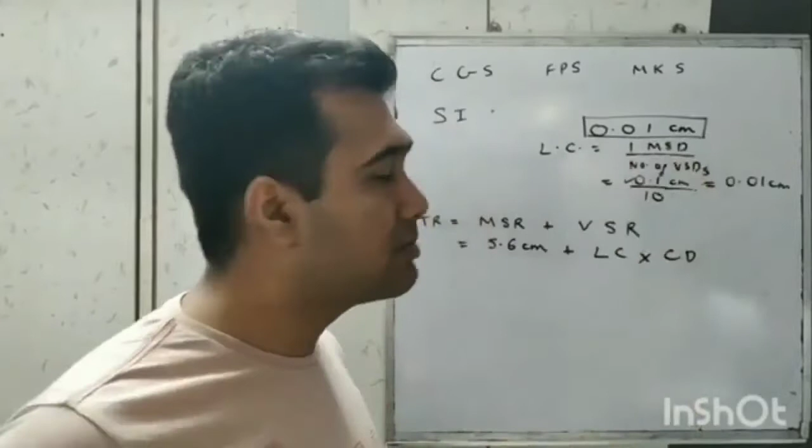If you want to decrease the least count, that is increase the accuracy of the instrument, then there are 2 ways. Either you decrease 1 main scale division on the main scale, or you increase the number of vernier scale divisions on the vernier scale. Lower the least count, more accurate is the instrument.

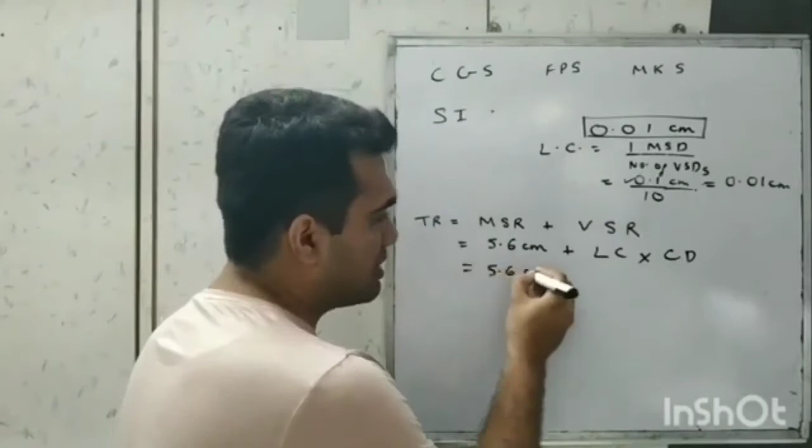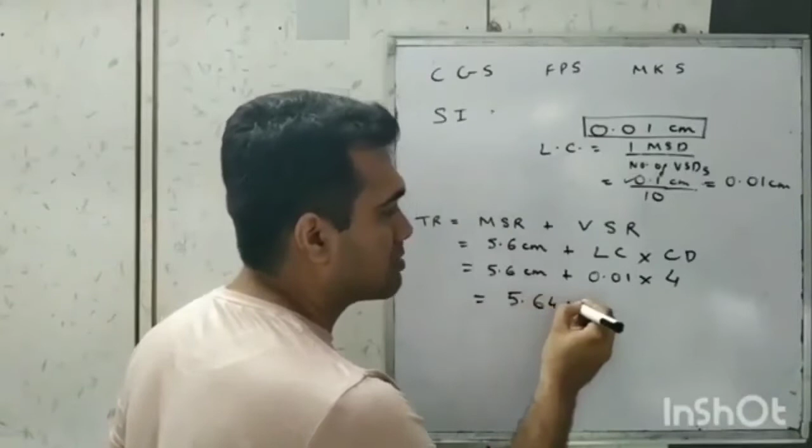So 5.6 centimeter plus least count 0.01 into coinciding division. So in this diagram, look at which division is coinciding between the vernier scale and the main scale. The 4th division is coinciding. So 4. The final answer comes up to be 5.64 centimeter. So we get the answer accurate up till the 2nd decimal.

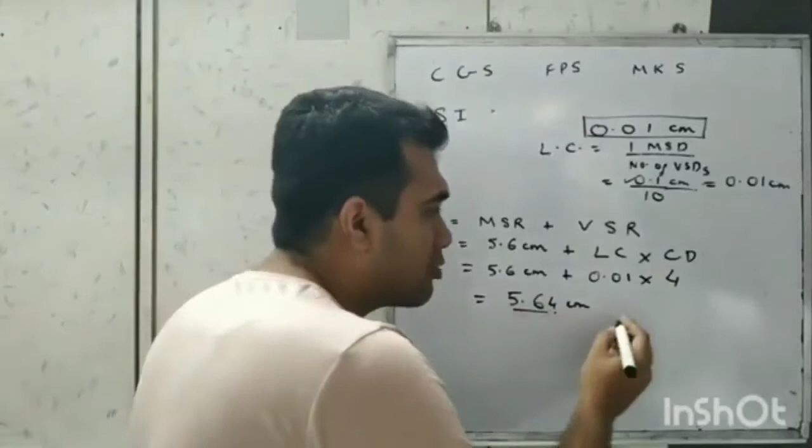It's possible that due to wear and tear, there might be a zero error in the vernier scale, which means that when the jaws are together, even before starting the measurement, if the 0 of the vernier scale and the 0 of the main scale are not coinciding, then that is called a zero error, which means that the final answer is not accurate, so in the end we may have to add or subtract the zero error to get the accurate answer.

Now, there are 2 types of zero errors. The positive zero error happens when the 0 of the vernier scale is initially to the right of the 0 of the main scale, and negative zero error happens when the 0 of the vernier scale is to the left of the 0 of the main scale initially.

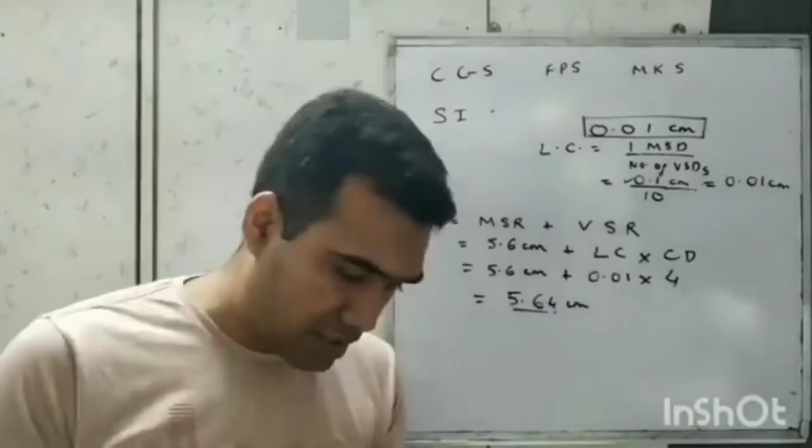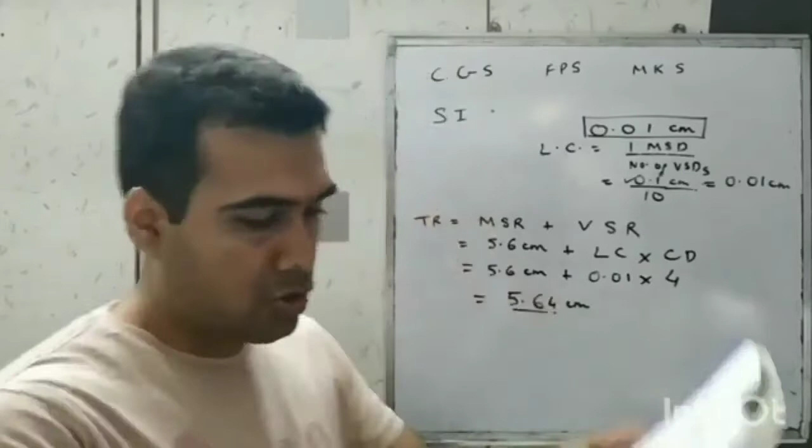Now, what if I want measurement up till 3 decimals or 4 decimals? I need an instrument which is even more accurate. That means something which has an even smaller least count, and that is screw gauge. And if you want accuracy up till 4 decimal places, that is called a micrometer screw gauge, which looks like this. Now in a micrometer screw gauge, we see how the spindle, that is B, can be rotated with the help of the ratchet such that it can move forward or backward.

Initially the spindle is touching the stud, but if we want to measure the thickness of a paper or a wire, we put it between A and B, that is the spindle and the stud, and we rotate the ratchet such that the spindle presses against the object tightly, but not too tight.

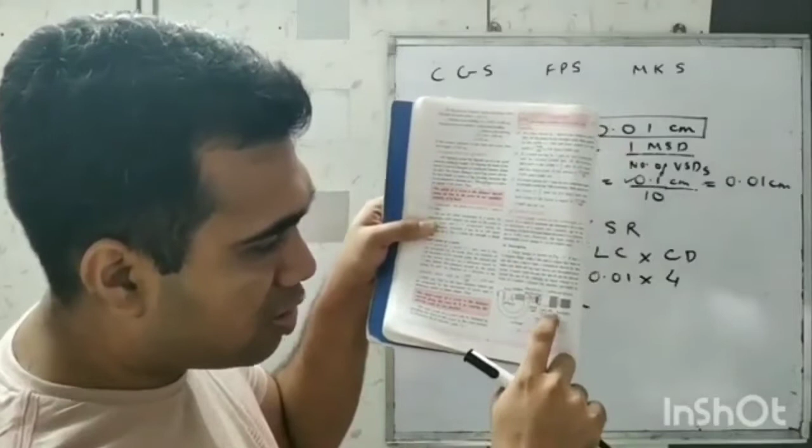On the sleeve here, we have the main scale, and the line is called the baseline. And on this hollow cylinder called thimble, we have the circular scale, which will have circular scale divisions, usually from 0 to 100. The logic behind it is the same. The formula is total reading or final reading is equal to the main scale reading plus the circular scale reading. Here, the circular scale reading is again least count multiplied by coinciding division. Main scale reading again will give us the answer up to 1 decimal accuracy.

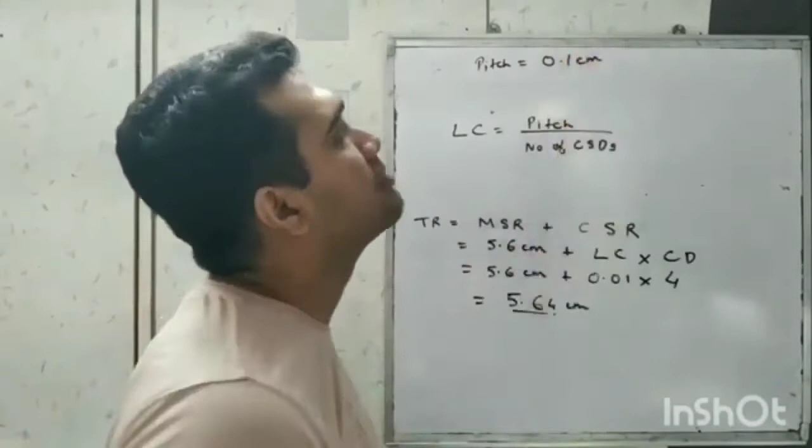Let's say 5.6 centimeter. Now least count of a screw gauge has a formula: pitch upon number of circular scale divisions. But what is pitch? Now, pitch of a screw gauge is the linear distance moved by its screw on the main scale when the circular scale is given one complete rotation. The pitch is 0.1 centimeter. And if you take the number of circular scale divisions as 100, then the least count comes up to 0.001 centimeter.

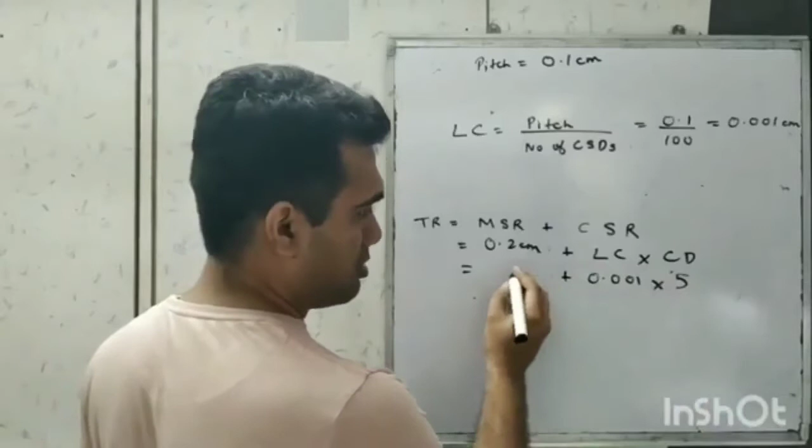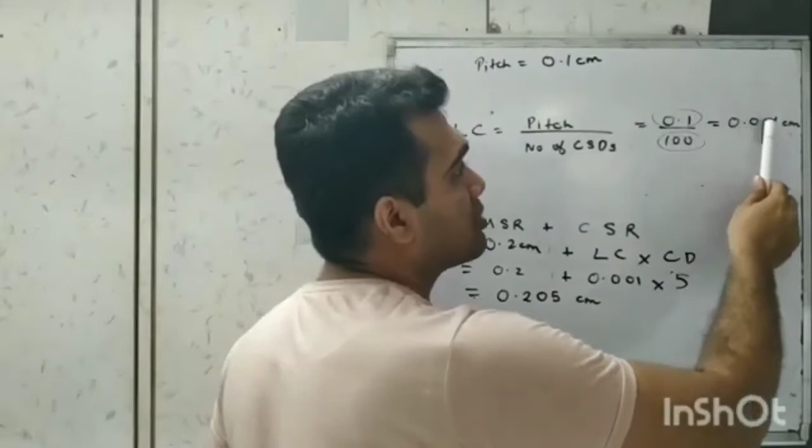Here, I can see 1 millimeter, 2 millimeters, but I can't see the 3 millimeter mark. So the main scale reading is 2 millimeters or 0.2 centimeter. So now, on further calculation, I get the answer as 0.205 centimeter. So I got accuracy up till 3 decimal places. If we could decrease the pitch further and increase the circular scale division, we might get a least count of 0.0001 centimeter, which will be a micrometer screw gauge, giving us the answer up till an accuracy of 4 decimal places.

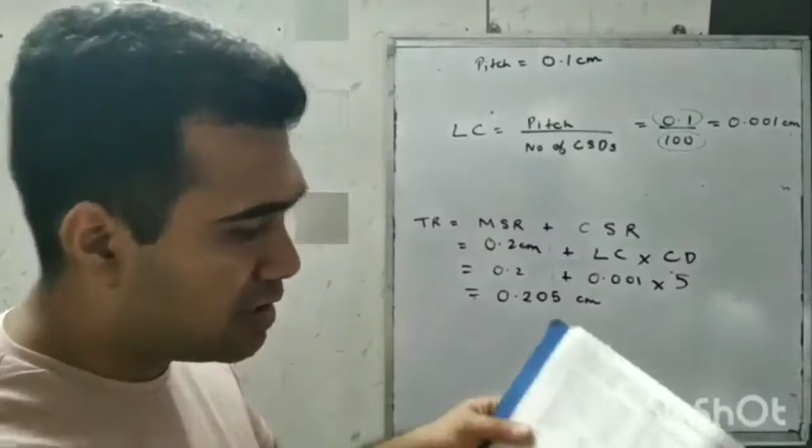Now, even here, we can have zero error. So initially, when the stud and the spindle are touching each other, even before the measurement begins, at that time, if you see the zero of the circular scale division below the baseline, it is called positive zero error. If you see the zero of the circular scale division above the baseline, initially, we call it a negative zero error.

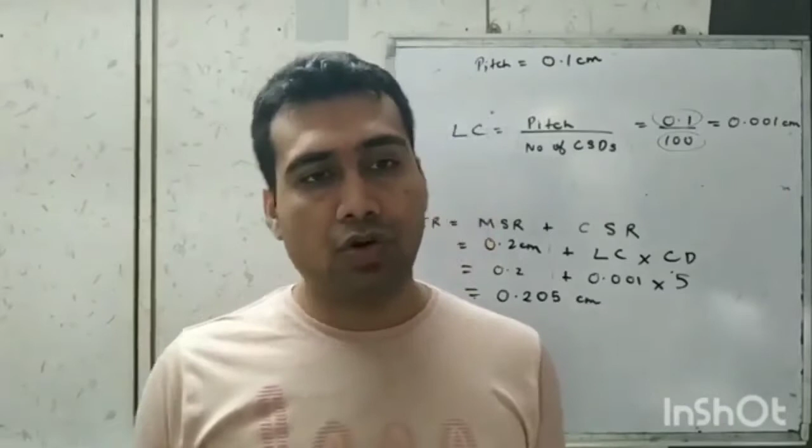We may also have something called a backlash error. This happens due to wear and tear. So while we are rotating the screw, and if we suddenly change the direction of rotation, even though we are rotating the screw, it may not move, due to which we may get an error in its reading.

So the solution to that is, we should never change the direction of rotation suddenly. Suppose we are rotating it clockwise and we want to rotate it anti-clockwise. Then continue rotating it clockwise, slow down, come to a stop, pause, and then start rotating it anti-clockwise. This will remove the backlash error.

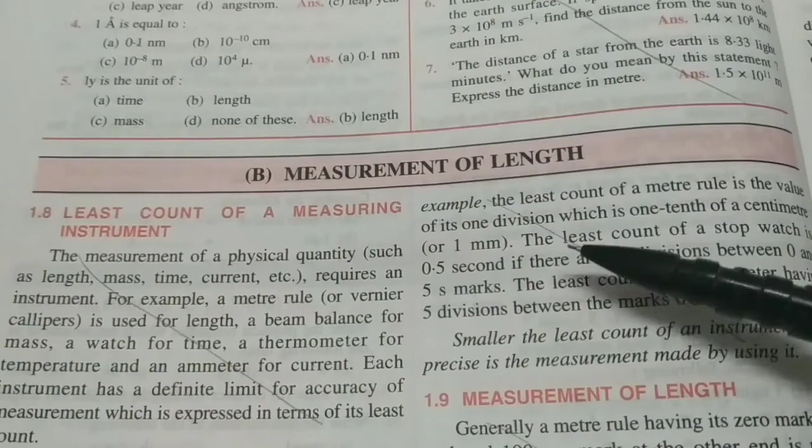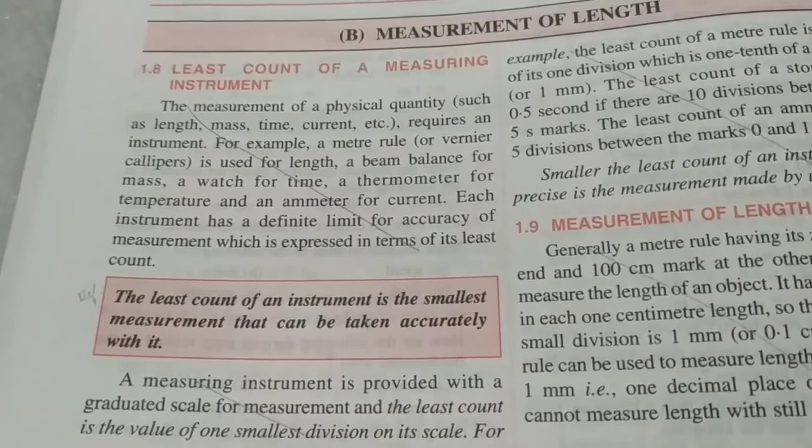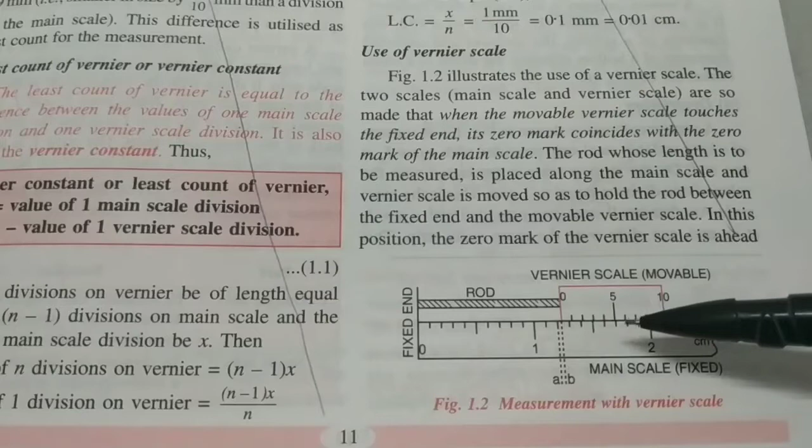Now here, what is the main scale reading? It's 1.2 centimeter. But the actual reading should be between 1.2 to 1.3 centimeter. So to get the accuracy up till the second decimal, we use the Vernier scale. Here, we need to understand what is the coinciding division. I can see that it is 1, 2, 3. The fourth division is coinciding between the Vernier scale and the main scale. This will be helpful for us to find the Vernier scale division, and then the final reading will be accurate up to 2 decimal places.

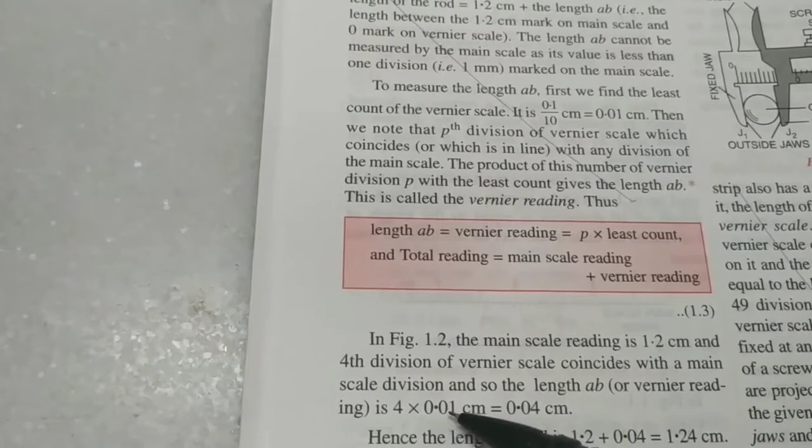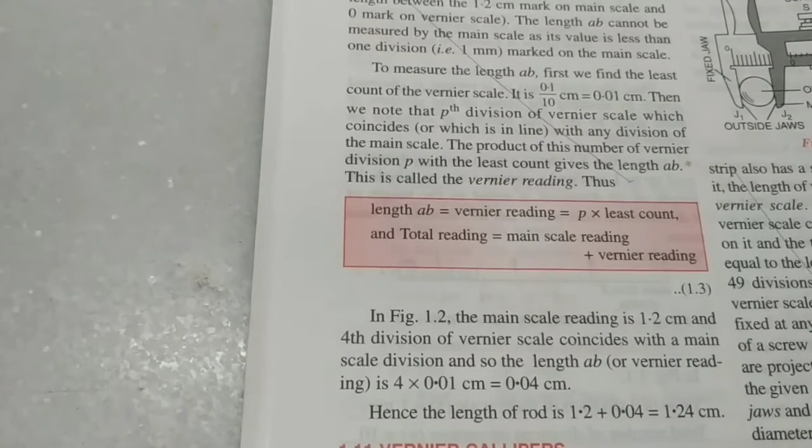So the formula is total reading is equal to main scale reading plus Vernier reading. In the diagram, the main scale reading was 1.2 centimeter, as I said. And the Vernier reading is nothing but the coinciding division, which was 4, into the least count. The least count of that Vernier scale was 0.01 centimeter, since it gave us accuracy up to 2 decimal places. So adding that, we get the final result as 1.24 centimeters. This is the logic behind using Vernier calipers, which is also called slide calipers. It is used to measure the length of a rod, the internal and external diameters of a hollow cylinder, etc.

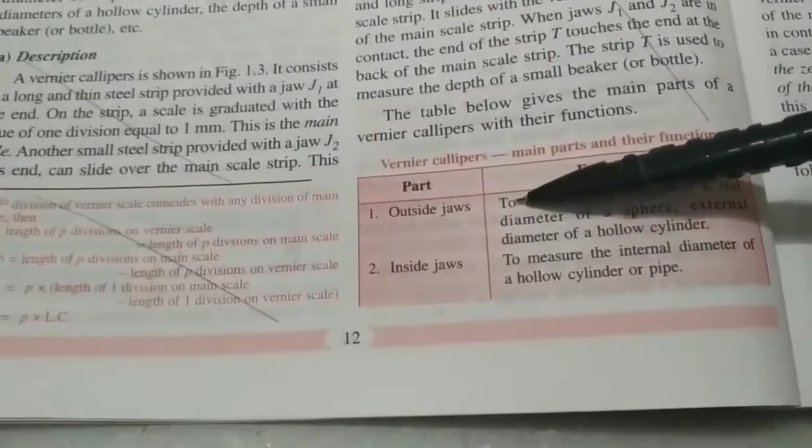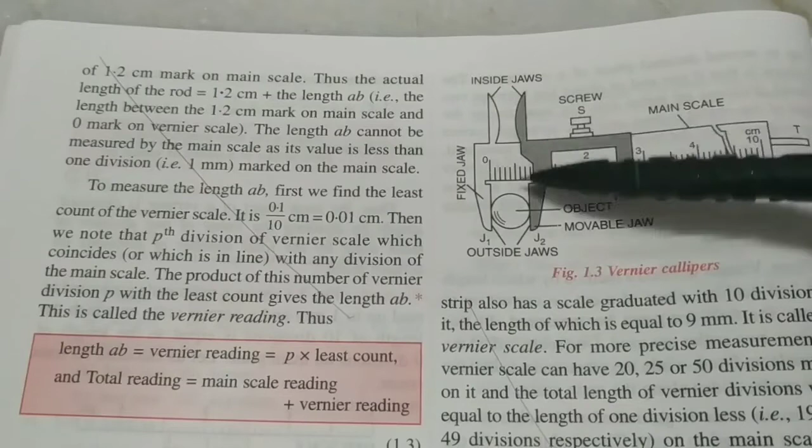The description is totally cancelled, although you need to know the parts of the Vernier scale and their uses. That's important. The outer jaws and the inner jaws are used to measure the diameter, the external and the internal diameters of spheres, pipes, etc. The strip is used to measure the depth of a beaker or a bottle.

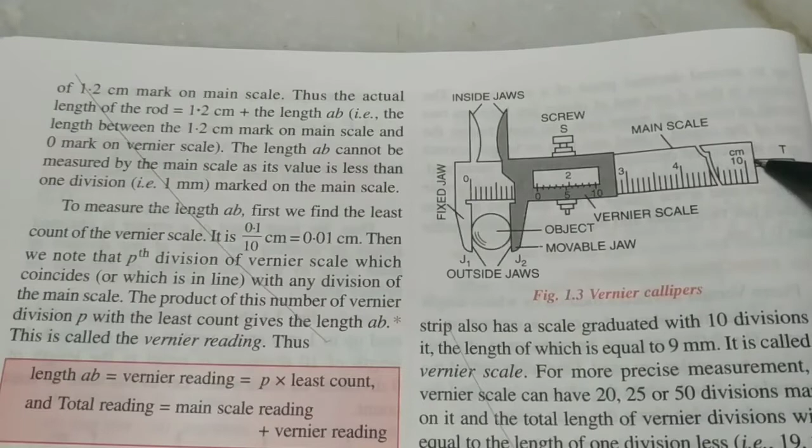This is the main scale. It's shown broken out here just to jump from 4 to 10 centimeter directly. This is the Vernier scale, which would measure length correct up to 0.1 millimeter or 0.01 centimeter.

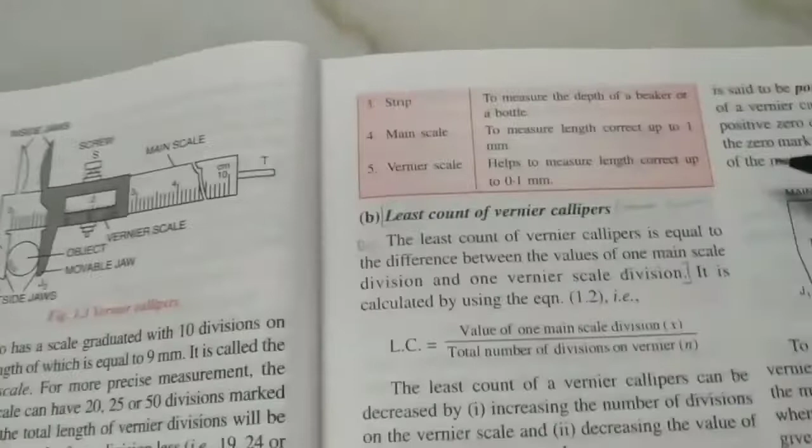Now the least count of Vernier calipers, also called Vernier constant, is defined as the difference between the values of one main scale division and one Vernier scale division. But the formula is different from the definition. It is the value of 1 MSD upon total number of Vernier scale divisions.

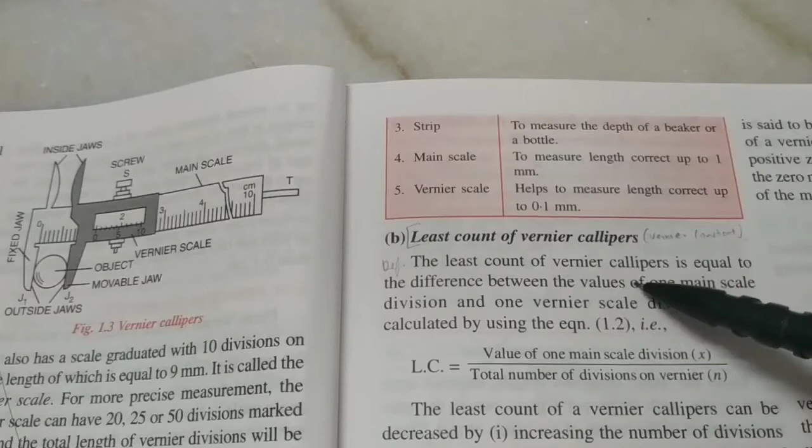Now, as per definition, the main scale reading is 0.1 centimeter. Each reading on a Vernier scale is 0.09 centimeters. So after subtraction, we do get the least count as 0.01 centimeter, which is the same value we would get by using this formula. There are two ways to decrease the least count, that is increase the accuracy of a vernier caliper: either increase the denominator here or decrease the numerator here.

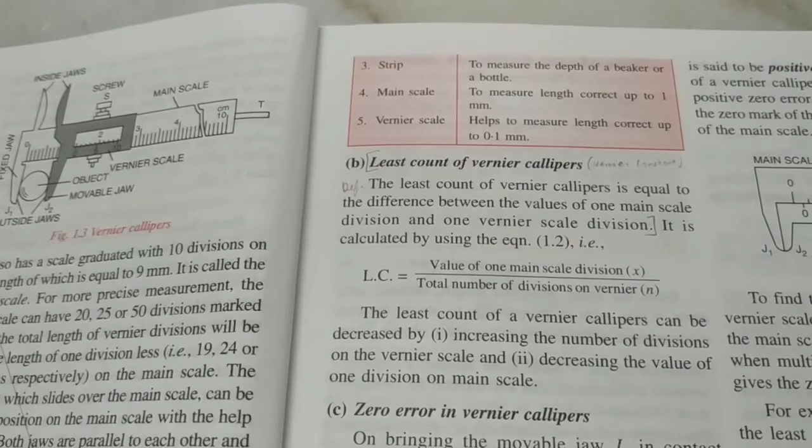But often when we start using a vernier calipers, the zero of the main scale and the vernier scale may not coincide, which means that there is a zero error. So to compensate for that, we have to add or subtract that zero error in the final answer. Now initially, when the jaws are touching each other, if the zero of the vernier scale is to the right of the zero of the main scale, we say there is a positive zero error. So in the end, we should subtract that value.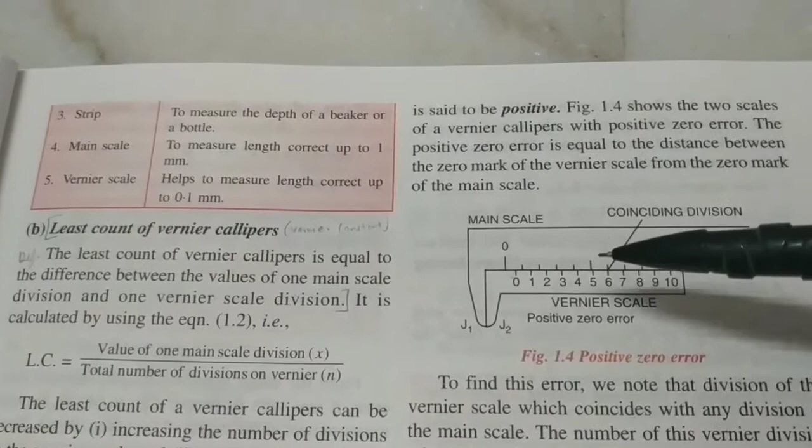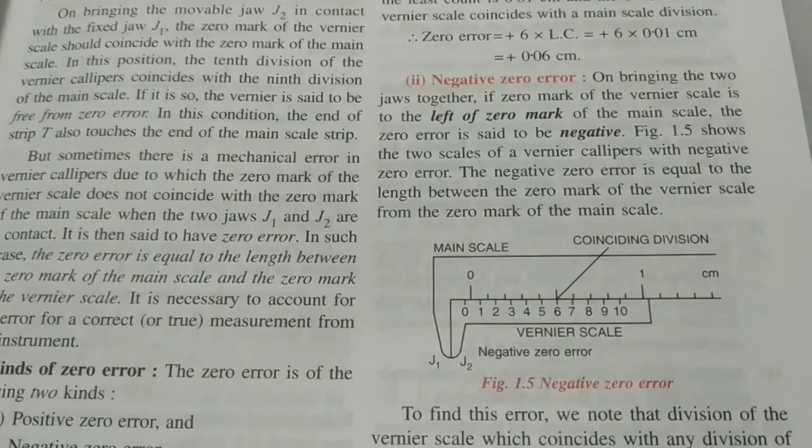On the other hand, if the zero on the vernier scale is to the left of the zero of the main scale, it is called a negative zero error, and we'll have to add that error in the end. How that zero error is calculated is not in syllabus, but the correct reading is the observed reading minus the zero error. A positive zero error will be subtracted, but a negative zero error will be added in the end. This experiment is cancelled.

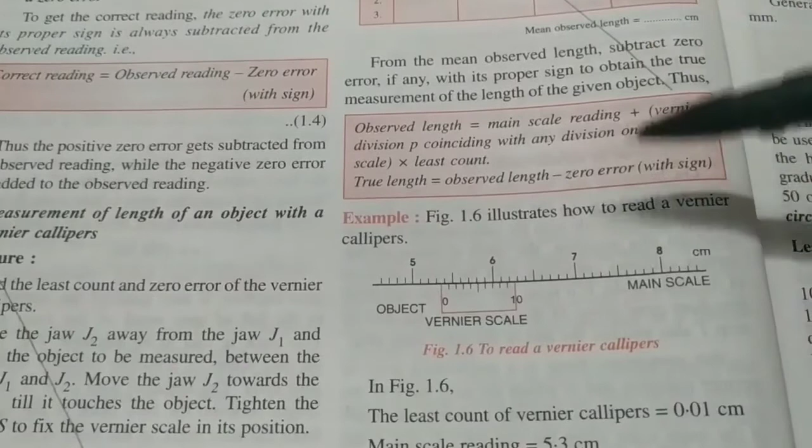Now let's look at this example. Imagine there is no zero error. Now what is the main scale reading here? Well, I see that the red line is till here. That is, it's between 5.3 and 5.4 centimeters. So we say the main scale is 5.3 centimeters. And now for the vernier reading, first find the coinciding division. 1, 2, 3, 4, 5, 6. I see the sixth division is coinciding.

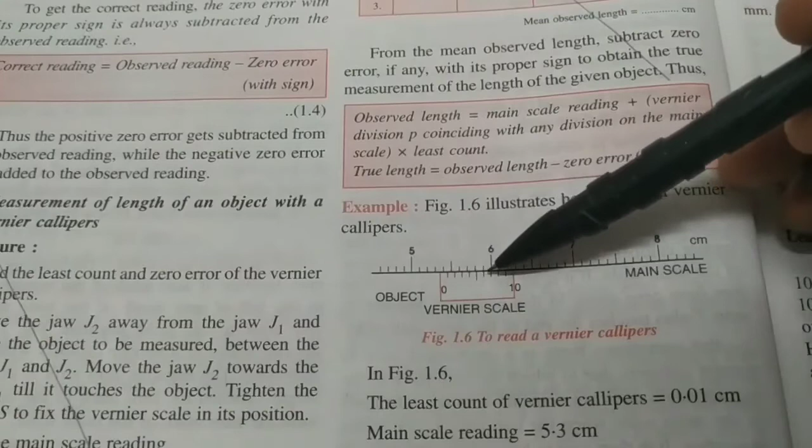So the coinciding division is 6 multiplied by the least count, which is 0.01 centimeter. So we get the vernier scale reading. And the observed reading is the main scale reading plus vernier scale reading. 5.36 centimeter is the final answer. So that's how we get answers accurate up to 2 decimal places. But what if you want an answer up to 3 decimal places? Then we use a screw gauge. So all of this is cancelled.

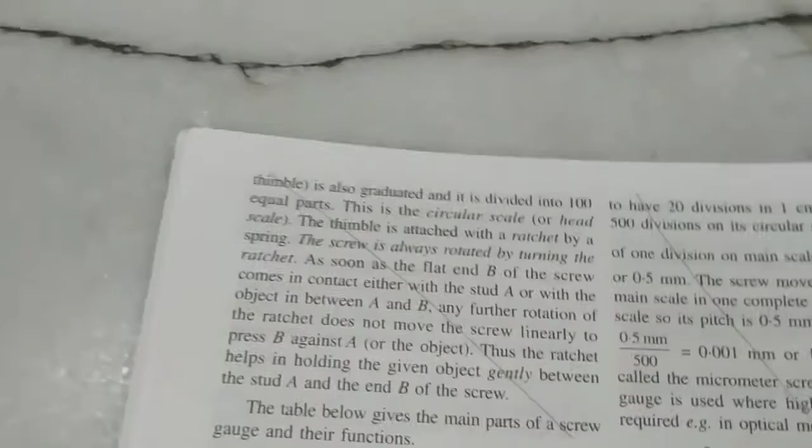The description need not be studied, but the uses of each part should be studied. Remember, the circular scale helps us to read the length correct up to 0.01 millimeter or 0.001 centimeter, although the least count of the main scale is still the same, 1 millimeter or 0.1 centimeter. Now we need to understand a couple of definitions here.

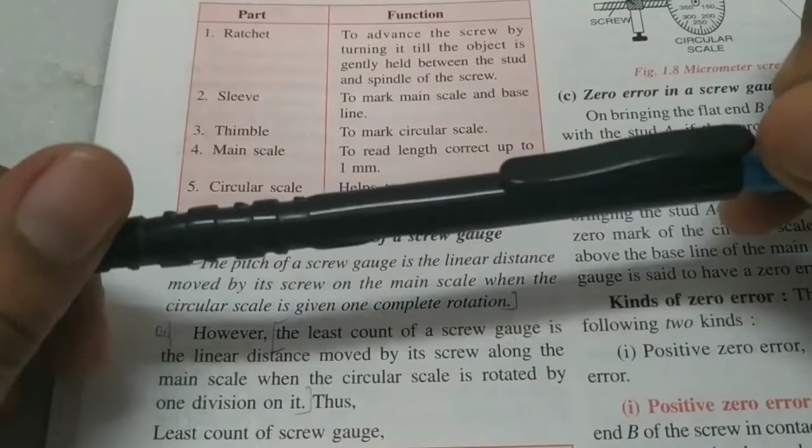First of all, pitch. Pitch of a screw gauge is the linear distance moved by its screw on the main scale when the circular scale is given one complete rotation. So imagine this is a screw. This is the starting point. If I rotate it one complete time, how much has it gone ahead on the main scale? That is called the pitch, which is usually 0.1 centimeter.

Now the least count of a screw gauge is the linear distance moved by its screw along the main scale when the circular scale is rotated by just one division on it. So for pitch, I said you have to rotate it by one complete rotation. But for least count, we should rotate it just a bit, just equal to one division on the circular scale. So by how much will it move ahead? That is called the least count of a screw.

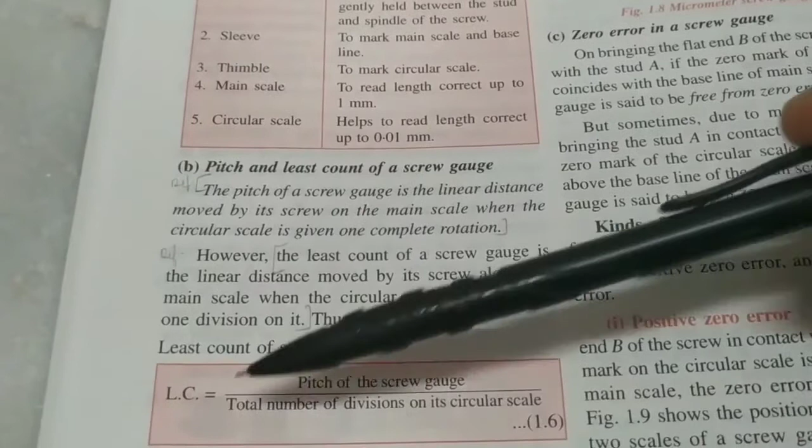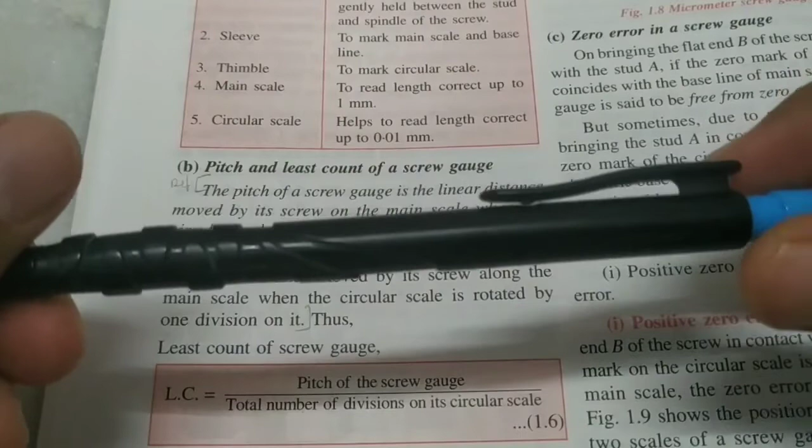So the least count has a formula, the pitch of the screw gauge upon the total number of divisions on its circular scale, which is usually 100. So if the pitch of the screw, that is the distance traveled after one complete rotation, is 0.1 centimeter and the total number of divisions is 100, then the least count becomes 0.001 centimeter. So now you see how we can get an accuracy up to 3 decimal places.

But how to make it even more accurate? That is, how to decrease the least count. Remember, lower the least count, more accurate the instrument is. So same logic, either you increase the denominator, that is number of divisions on its circular scale, or you decrease the pitch of the screw gauge, that is decrease the numerator.

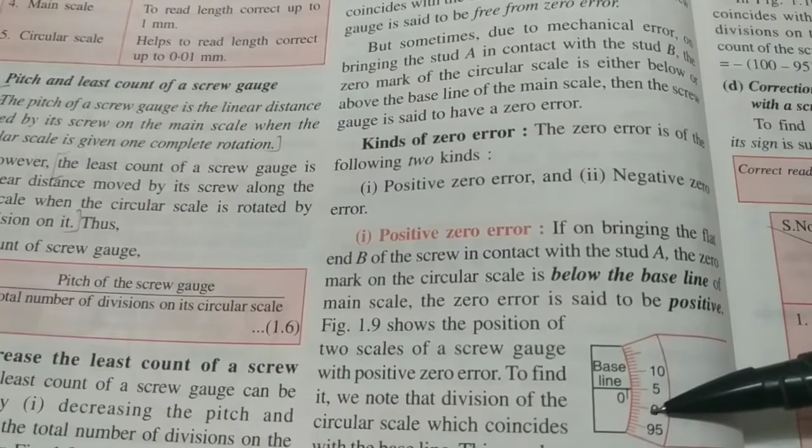Now even here, we may have a zero error. That is, in the very beginning, when the stud and the spindle are touching each other, the zero of the circular scale division may not coincide with the zero of the main scale division. So if the zero of the circular scale is below, we call it a positive zero error, which has to be subtracted in the end. But if the zero is above, we call it a negative zero error. So we just have to remember the definition and the diagram. The calculation part is not to be studied. So the final reading will obviously be the observed reading minus the zero error, just like in the previous case. All these experiments are cancelled.

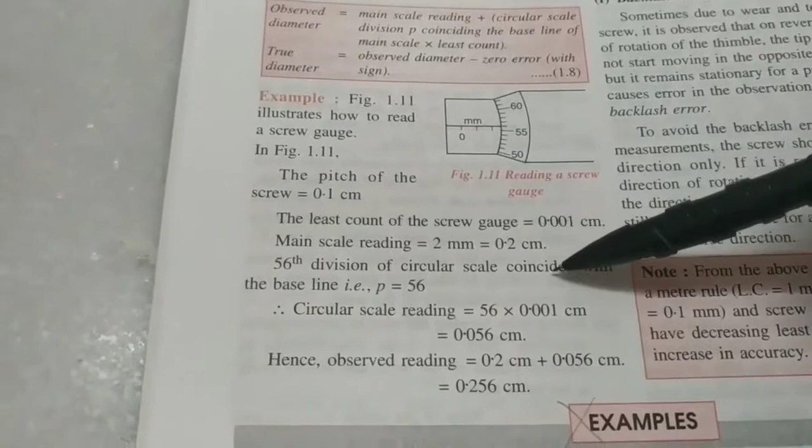Let's do one sum here. First of all, what is the main scale reading? 0, 0.1, 0.2, 0.2 centimeters. And what is the coinciding division here? I see 56 is coinciding with the baseline, with the main scale. So 56 into the least count. And the least count for this sum is given in the question as 0.001 centimeter, which is usually the case. So the observed reading is 0.2 plus 0.056 centimeter, which is 0.256 centimeter. And here we are assuming that there is no zero error.

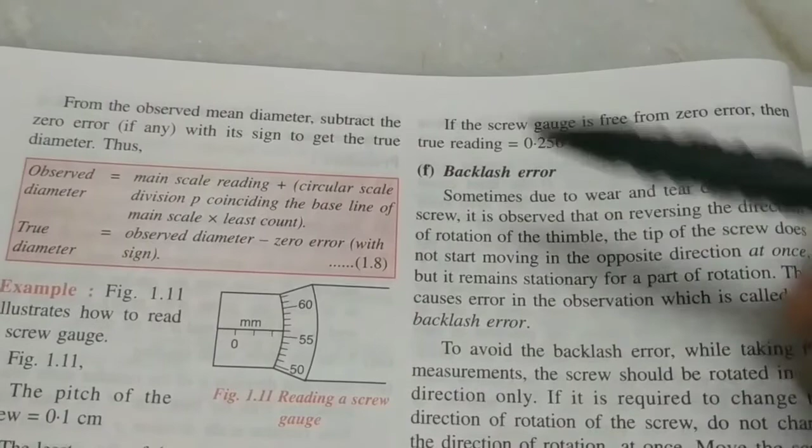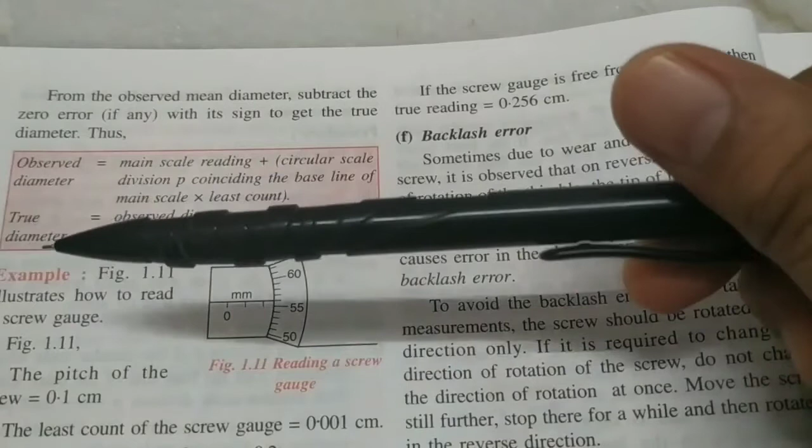Finally, we have something called the backlash error. Sometimes, due to wear and tear of the thread screw, even when you rotate the ratchet, you see that the screw is not moving forward. This will give us an inaccurate answer. So what we should do is, whenever you want to change direction of rotation, don't immediately do it. You slowly come to a stop, keep moving forward, pause for some time, and then you rotate it back if you want the screw to come back. This way, there would be no error.

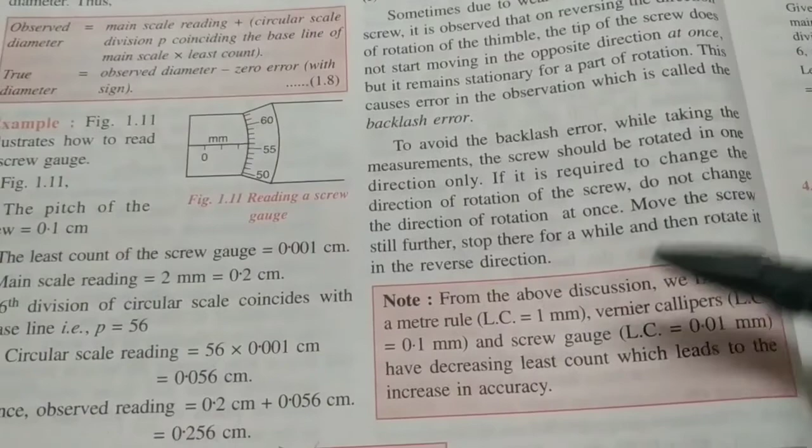Remember this note as well. Notice that smaller the least count, more accurate it is. So which of these has the lowest least count? Screw gauge. And which is the most accurate? Screw gauge.